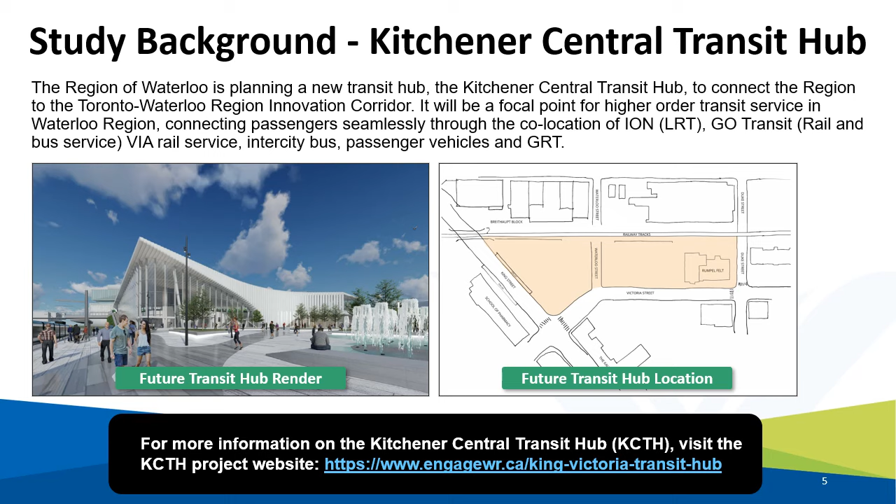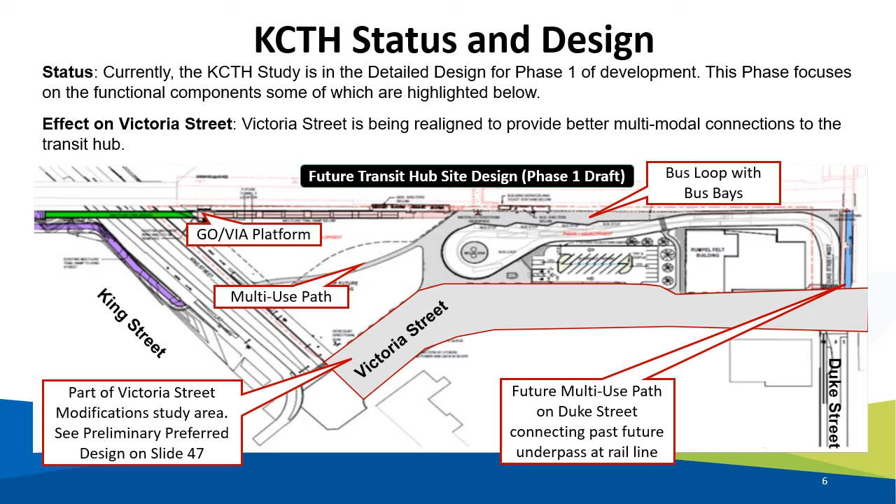This created an opportunity for the region to plan for a roadway that complements the KCTH, that is safe and sustainable, and that accommodates the future larger pedestrian and cyclist movements that result from current and future increasing trends in active transportation uptake. As such, the region initiated the Victoria Street Modifications, King Street West to Weber Street West study. The study area is central to Victoria Street, from King Street to Weber Street.

The study's objectives include but are not limited to the following: create high-quality multimodal connections to facilitate first and last mile connections to the future Kitchener Central Transit Hub site by walking, cycling, and using transit. Support the region's transportation master plan recommendations for providing good walking facilities on both sides of all regional roads, for separated cycling facilities in key corridors, and for increasing transit service frequency.

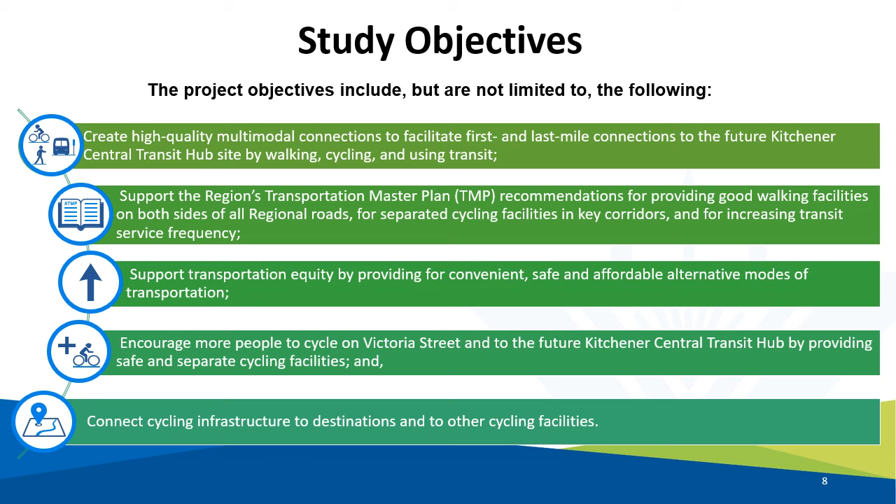Support transportation equity by providing for convenient, safe, and affordable alternative modes of transportation. Encourage more people to cycle on Victoria Street and to the Kitchener Central Transit Hub by providing safe and separate cycling facilities, and connect cycling infrastructure to destinations and to other cycling facilities. In the next slide, we will review the study schedule.

The region initiated the Victoria Street Modifications, King Street West to Weber Street West study in November 2022. Under the newly approved amendments to the Municipal Class Environmental Assessment, or MCEA for short, the study is a Schedule B project. The region recognizes the importance in completing a comprehensive study and in engaging stakeholders and the public during the study. As such, the study is generally following the study process of an MCEA process, which are as follows.

Phase 1, Problems and Opportunities. During this phase, the existing and planned conditions of the study area are reviewed and a Problems and Opportunities statement is stated. These will be presented at this PCC.

Phase 2, Develop and Evaluate Alternative Solutions. In other words, looking at functionally different solutions to the project that address the problems and selecting a technically preferred solution. We are currently at the end of this phase. During the PCC, we will review the work completed to date, the problems and opportunities, the developed planning solutions, the evaluation of planning solutions, and the preliminary preferred planning solution.

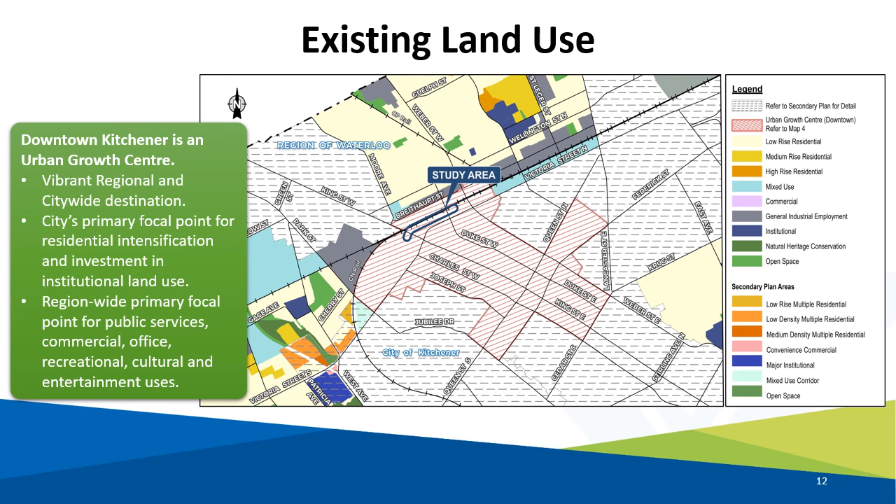The next section summarizes the existing and planned conditions of the Victoria Street modifications, King Street West to Weber Street West study. The map here outlines the existing land uses in the project area. The blue line outlines the project study area. The study is located within the downtown Kitchener Urban Growth Centre, which is envisioned to be a vibrant regional and citywide destination. It is intended to be the City of Kitchener's primary focal point for residential intensification and investment in institutional land use, and a region-wide focal point for public services, commercial, office, recreational, cultural, and entertainment uses.

The study area is located within the Innovation District of the Urban Growth Centre. This district is characterized by many large old industrial buildings which have already been converted or have the potential for conversion to loft-style office and residential uses and other variable uses. This area is different from the rest of the downtown as Victoria Street carries through traffic, not necessarily destined for the city center.

It is anticipated that this district will evolve with the development of the KCTH. The Innovation District will continue to transform into a dense, contemporary urban setting. The presence of high-tech and health science-related office uses, as well as new post-secondary and research-related institutional uses, is expected to grow over time.

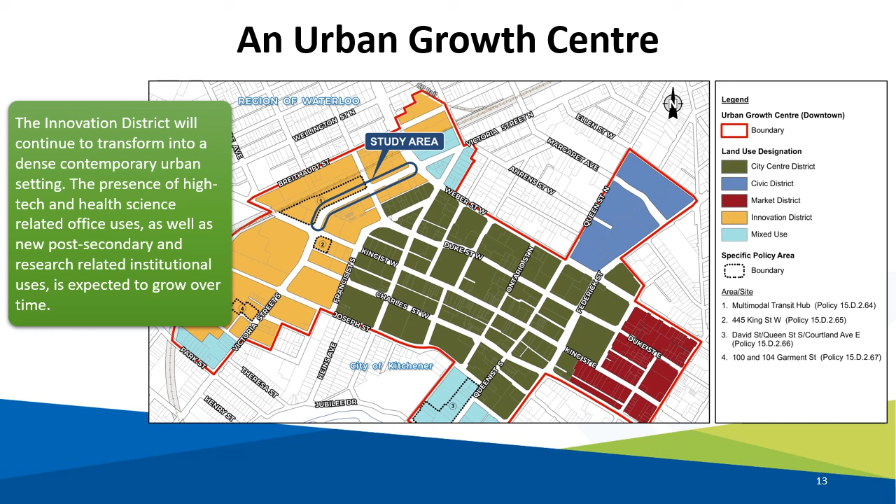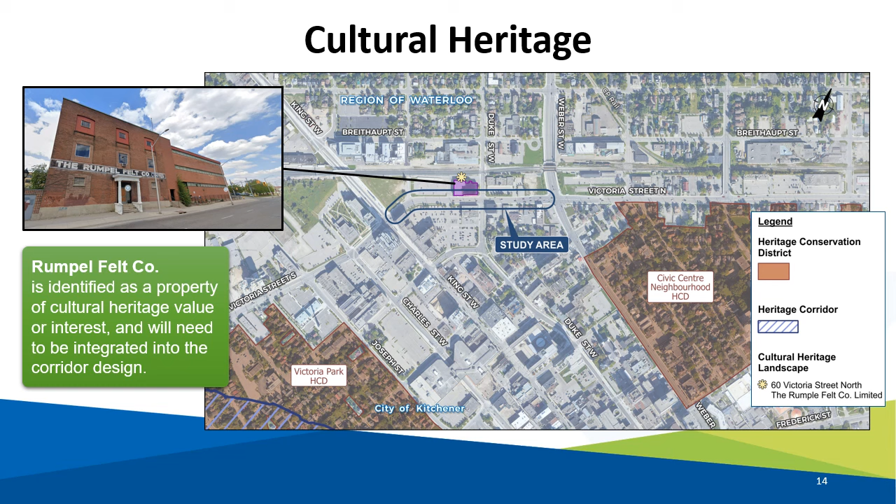The City of Kitchener is rich in history and is home to many built cultural heritage resources and cultural heritage landscapes, which are highlighted in brown. Within the study area, the Rumpel Felt Co. building is identified as a property of cultural heritage value or interest and will need to be integrated into the corridor design. There is a portion of this building that is not set back from the sidewalk and goes right up against the road's right-of-way. This will be a constraint as the road cannot be widened here.

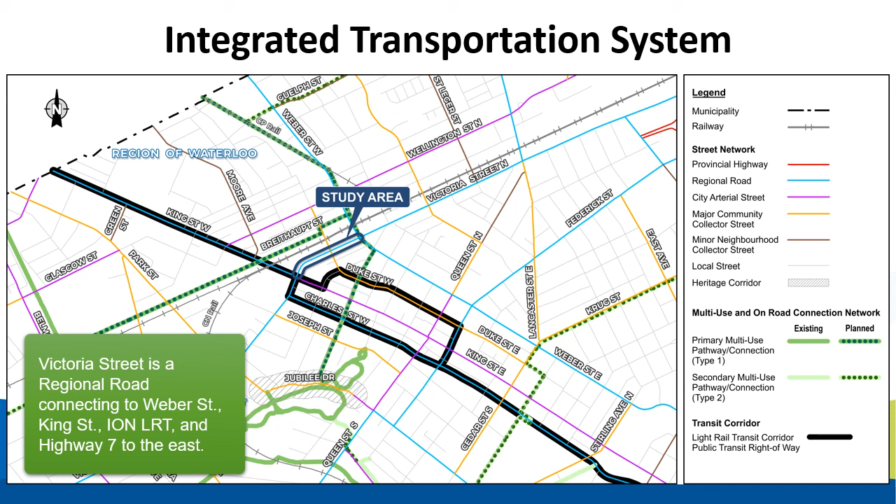Victoria Street is a regional road that travels east-west across the region and through downtown Kitchener. Most notably, King Street, which is a city arterial road, intersects the Victoria Street study area on the west end of the study area. King Street is a major transit connection for the future KCTH, as it is the ION Light Rail Transit, or LRT, corridor, connecting the cities of Waterloo, Kitchener, and Cambridge to major nodes and destinations.

Victoria Street connects to some existing facilities that can accommodate cycling. There are multi-use paths on King Street and Weber Street. There are also planned active transportation connections to the study area, which are shown in dotted lines. There is a planned multi-use pathway that will connect Victoria Street to the future GO Transit and Via Rail train platform and future bus bays, a future two-way cycle track on Duke Street from Victoria Street connecting southbound through downtown Kitchener, and a future multi-use path on Duke Street connecting to the Breithaupt neighborhood.

As mentioned previously, Duke Street north of Victoria Street to the railway tracks will be decommissioned to vehicles. It will only be used by buses entering the bus loop and by pedestrians and cyclists connecting to the multi-use path.

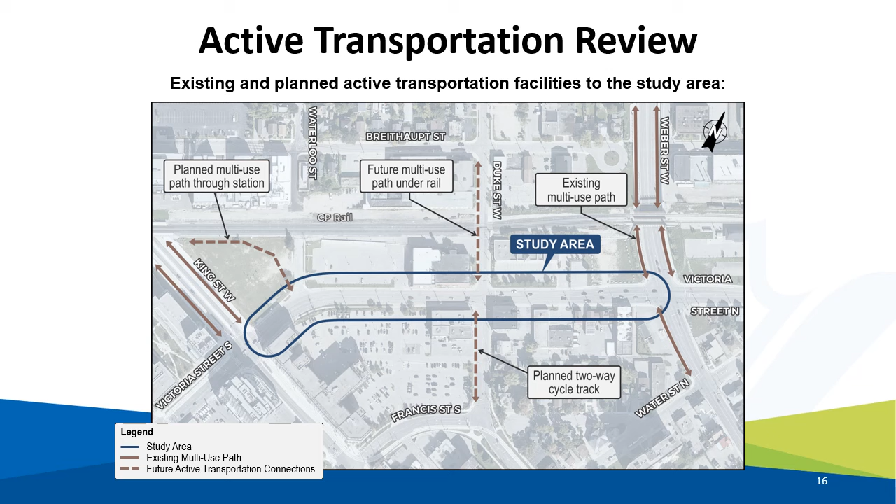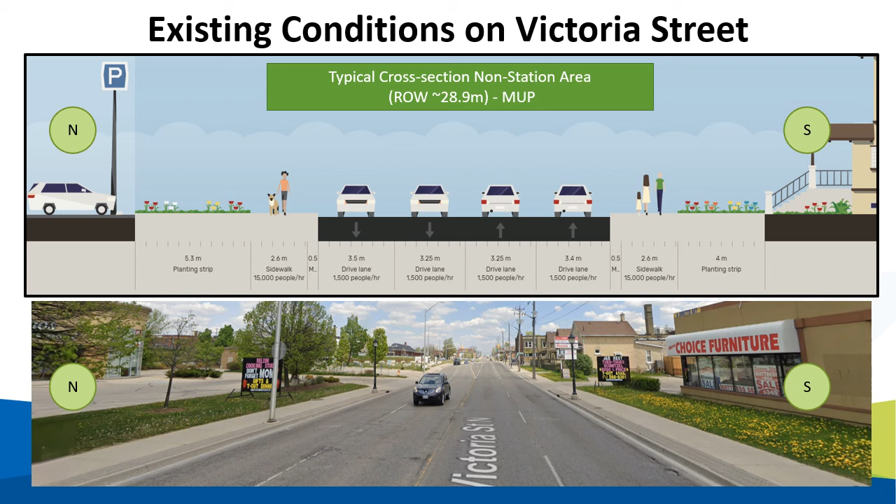The context of the roadway is generally consistent from King Street to Weber Street. This is the view of the existing conditions on Victoria Street, east of Duke Street looking east. Victoria Street is configured with a sidewalk on both sides of the street with 4 vehicular driving lanes. There are no existing cycling facilities in the study area.

The next slides will note the policies and best practices review this project will be following. This project will be working within the existing policy framework at the provincial, regional, and municipal level, such as following the provincial policy statement, places to grow, the regional and local official plan, and the region's transportation master plan, to name a few. The 2018 Transportation Master Plan provides the policy background for the region's transportation network.

Waterloo Region is envisioned to be a prosperous, sustainable, and healthy community with viable transportation choices for people of all ages and abilities, and for the goods supporting our economy. Strategies include Strategy 1, build a transportation network that supports all modes of travel. Strategy 2, promote a healthy community, such as create and/or upgrade active transportation facilities, upgrade facilities to improve separation from traffic, identify opportunities for and implement crossings of major barriers, enhance network connections, and enhance walk and bike access to transit.

More recently, policy direction from the Climate Action Strategy sets high goals for sustainable transportation. The strategy aims for the majority of trips to be taken by active transportation by 2050 through relying on a robust public transit system. To achieve this goal, the strategy guides the region to redesign, rebuild, and maintain our transportation system to prioritize active transportation, plan a network of major active transportation corridors that will provide priority travel for walking, cycling, and rolling to key destinations, build neighborhood connections to the active transportation network, design and maintain active transportation infrastructure to ensure year-round access, safety, and comfort for people of all ages and abilities.

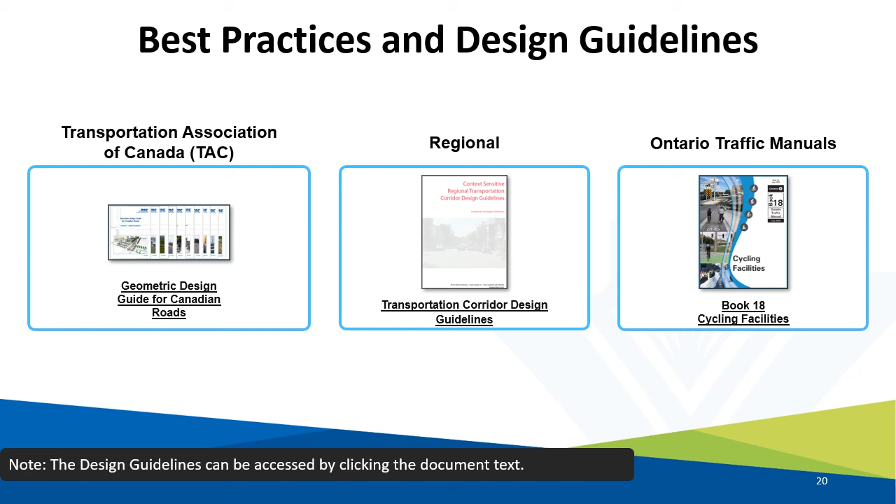This slide includes some examples of the best practices for AT facilities and design guidelines our project team members will be referencing and following, such as the Geometric Design Guide for Canadian Roads, the region's context-sensitive Regional Transportation Corridor Guidelines, which provide design standards for planning and designing complete streets that include space for all modes of transportation, and the Ontario Traffic Manual Book 18, Cycling Facilities. This study refers to these guidelines while also following the latest best practices that have emerged since their publication.

Before we move on to the next section to explore the different design components of a road, there are some design considerations to review. Given Victoria Street's urban downtown context, a complete street approach is taken in the development of roadway configuration options. A complete street design approach was taken in the development of the different design options for the study. With the development of the Kitchener Central Transit Hub, promoting active transportation and encouraging a higher modal split, a complete street will help to enhance the corridor as an inviting, vibrant, and comfortable destination.

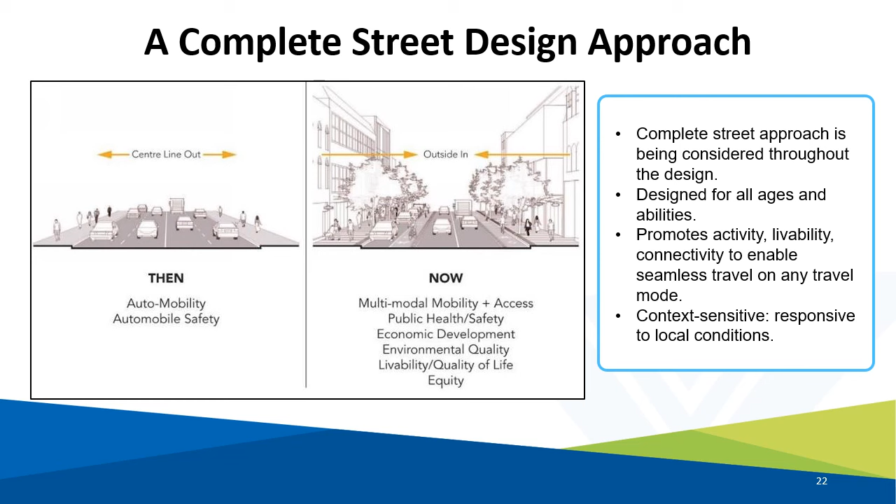Complete street designs are meant for all ages. This type of design promotes activity, livability, and connectivity for all modes of travel. We recognize that each community and each corridor is unique from other ones. As such, the complete street design approach for Victoria Street will include considerations to the projected traffic volumes, the projected needs of the corridor based on future land uses, the existing adjacent and surrounding neighborhoods, the desires of the community and stakeholders, the existing downtown character, and the widths of the road.

The cycling facilities should be elevated and separated from traffic for increased safety and better enjoyment of the street by both drivers and cyclists. Finally, moving towards center, we find the travel lane zones for vehicles here. Adjacent to the travel lane is a street or transit lane. Together, the travel lane and the transit lane form the roadway, the area dedicated to cars.

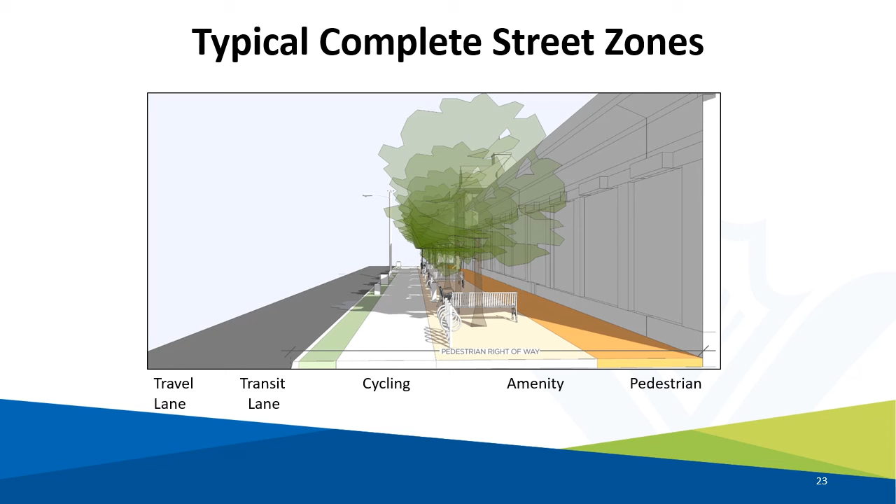Based on the background review of existing and planned conditions of the study area and beyond, a problem and opportunity statement was prepared to guide this study. Due to the Kitchener Central Transit Hub study and planned intensification, there is a need to redesign Victoria Street as a complete street to accommodate the KCTH site plan and design for safe and comfortable active travel due to the future increases in trips made by pedestrians, cyclists, transit users, and motorists.

After the careful review of existing and planned conditions and the preparation of the problems and opportunities statement, the project team considered functionally different methods of addressing the problems and opportunities for the corridor. These are known as alternative solutions and are different for different projects depending on the context.

To follow a complete street approach, the development and assessment of alternatives were broken down into the following steps. Step 1. Develop design alternatives for active transportation and for the roadway separately. Step 2. Develop an evaluation criteria for both sets of planning solutions based on environmental factors, impacts, and mitigation, as well as each planning solution's effectiveness at addressing the problems and opportunities statement.

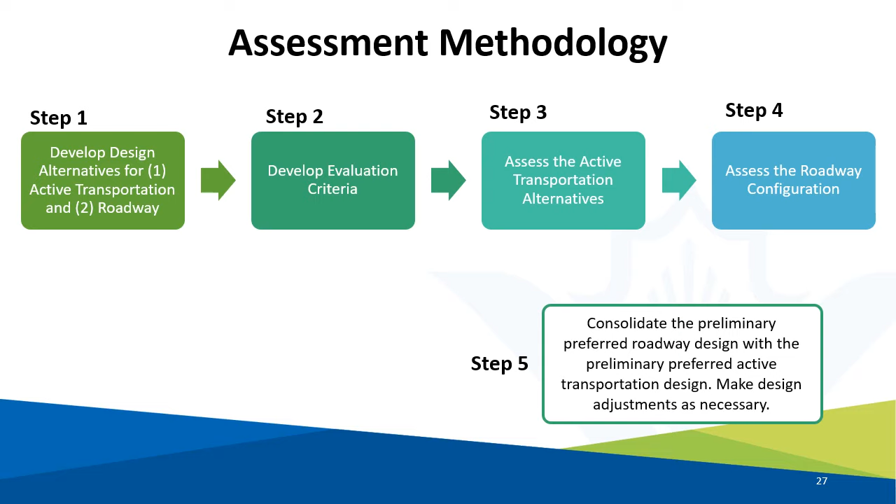Now that we have established the assessment methodology for this study, the next step is to review and evaluate the developed alternative planning solutions for active transportation and to select a technically preferred solution for active transportation. The developed alternatives for active transportation focused on different separated cycling facility options throughout the corridor. Cycling on car-dominated streets is undesirable due to the collision risks between motorists and cyclists. Physically separating cyclists from motor vehicles is the most effective tool to increase safety and cycling volumes.

In fact, only 3 to 5% of cyclists are willing to cycle in mixed lanes. Most cyclists are using sidewalks to travel. However, 50 to 70% of the population is interested in cycling if they are separated from cars. Additionally, motorists are concerned about colliding with cyclists on the road. Separated cycling facilities decrease the pressure on the roads as more people move into the area. Finally, a significant percentage of short trips, under 8 kilometers, are currently being taken by car. A network of separated cycling facilities, if maintained appropriately, also allows for safe year-round cycling, including in the winter.

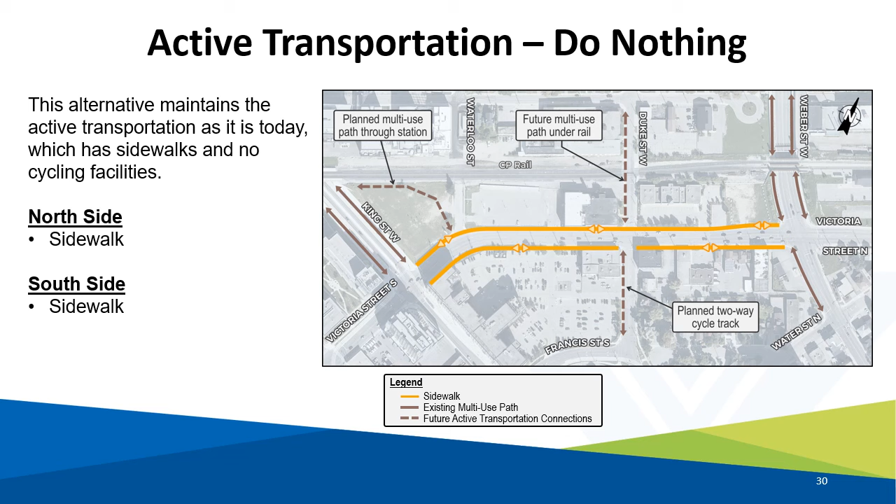This is Alternative A. This scenario improves the sidewalk widths on both sides of Victoria Street and incorporates two-way cycle track throughout the study area, as it is the recommended cycling facility type in dense downtown urban environments. This alternative has two-way cycle tracks on the north side of Victoria Street from King Street to the planned KCTH multi-use path that will connect to the future train platform and bus loop.

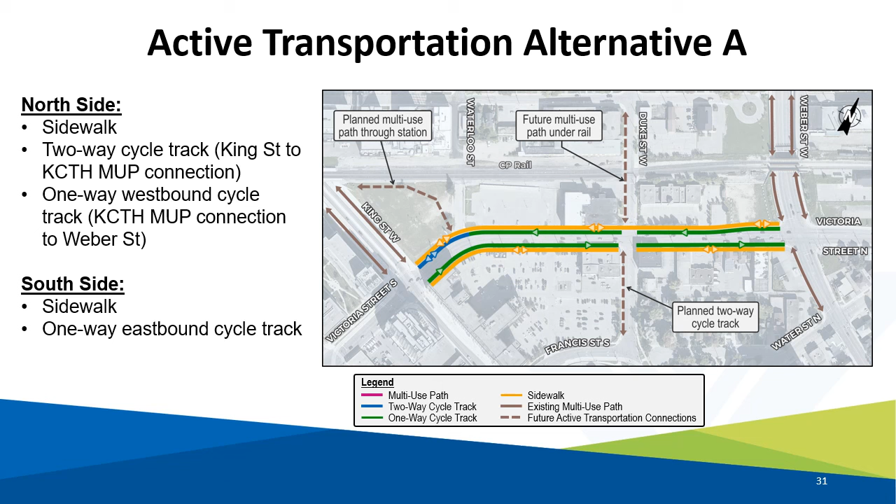Between there and Weber Street is a one-way westbound cycle track to Weber Street. On the south side, this alternative has a one-way eastbound cycle track traveling from King Street to Weber Street. All alternatives have the one-way eastbound cycle track traveling from King Street to Weber Street on the south side of Victoria Street except for Alternative D.

This is Alternative B. Like Alternative A, this alternative has the two-way cycle track on the north side of Victoria Street from King Street to the west end of the Rumpelfeld Co. building, and a one-way westbound cycle track from Duke Street to Weber Street. In this scenario, a multi-use path is located in front of the Rumpelfeld Co. building. This option was explored as the space in front of the Rumpelfeld Co. building is a constrained pinch point in the Victoria Street roadway at the intersection of Duke Street.

It should be noted that multi-use paths are not recommended in urban downtown roadways, as it is not considered safe nor comfortable in this context. Rather, multi-use paths are generally used in suburban and rural contexts. Like Alternative A, this scenario improves the sidewalk width on both sides of Victoria Street and has a one-way eastbound cycle track traveling from King Street to Weber Street on the south side of Victoria Street.

This is Alternative C. In this scenario, a multi-use path is located from the east end of the Rumpelfeld Co. building to the Weber Street intersection. This option builds off Alternative B to continue the multi-use path to Weber Street, where there is an existing multi-use path. Like Alternative A, this scenario improves the sidewalk widths on both sides of Victoria Street and has a one-way eastbound cycle track traveling from King Street to Weber Street on the south side of Victoria Street.

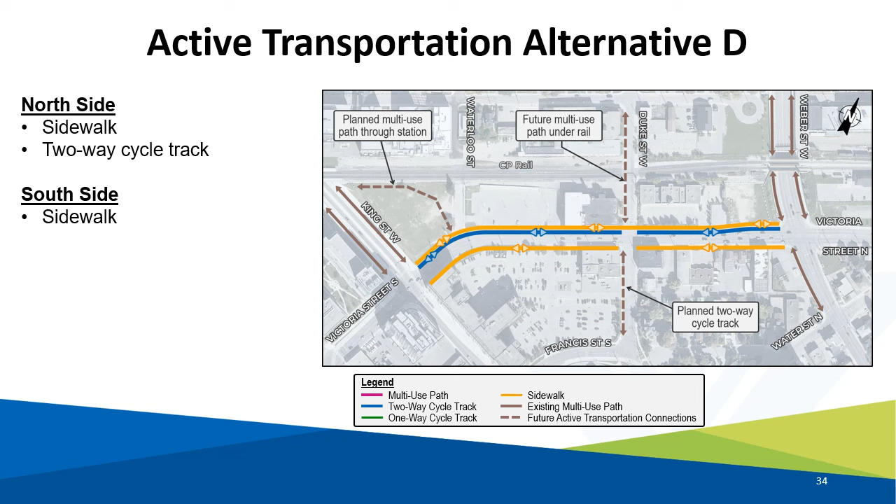The next section will present the evaluation criteria and assessment of these active transportation solutions. After identifying the alternative active transportation solutions, they were evaluated against the following criteria to determine their socioeconomic impacts as well as the planning and transportation needs of the alternative planning solutions. Some of the sub-criteria include

safety for pedestrians, including minimal exposures to bike and traffic, especially at intersections. Safety for cyclists, including safe crossings at intersections. Comfort for pedestrians, including facility width, separation from cyclists and traffic, and presence of landscaping. Comfort for cyclists, including facility width, separation from traffic, and presence of landscaping.

Connections to planned intersecting cycling facilities, preliminary property impacts, and the multimodal level of service, a new methodology for analyzing the quality of service provided by streets and intersections to users of all modes of travel, including transit, cyclists, pedestrians, trucks, and cars.

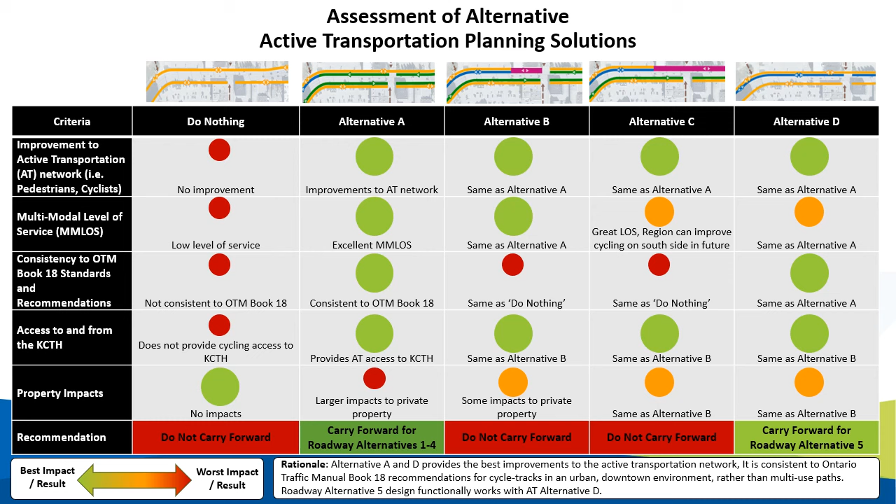These alternatives were evaluated to have the best benefits because they provide the best improvements to the active transportation network, both in terms of connections to other facilities, but also provide the safest and most comfortable travel for cyclists, and they are consistent with Ontario Traffic Manual Book 18 recommendations for cycle tracks in an urban downtown environment rather than multi-use paths. Therefore, alternatives A and D are the recommended alternatives. The selection of which alternative to use will depend on the functional compatibility with the preferred roadway alternative.

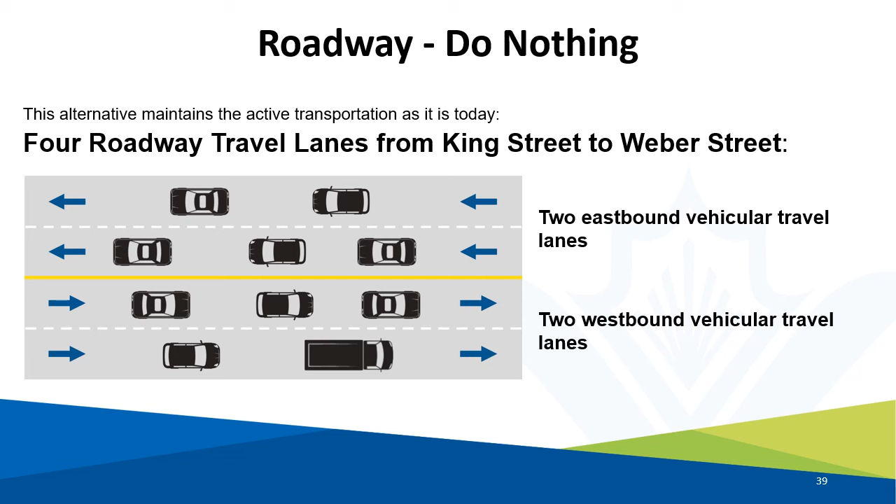The next section will present the developed alternative solutions for the roadway, meaning for vehicular travel. The first alternative is a do-nothing scenario. For the roadway, that means maintaining the existing vehicular travel lanes as they are, with 4 lanes of vehicular travel, 2 in each direction, westbound and eastbound. Alternative 1 has 3 vehicular travel lanes, 1 eastbound vehicular travel lane, 1 westbound vehicular travel lane, and a 2-way left turn lane as the center lane.

Alternative 2 has 3 vehicular travel lanes, 2 westbound vehicular travel lanes, and 1 eastbound vehicular travel lane. This alternative was developed based on traffic patterns coming from Highway 7 to the east and into or through the downtown. Alternative 3 has 3 vehicular travel lanes, 1 westbound vehicular travel lane, 1 eastbound vehicular travel lane, and 1 westbound transit priority lane. This alternative was developed based on anticipated transit traffic volumes that will be traveling to and from the KCTH.

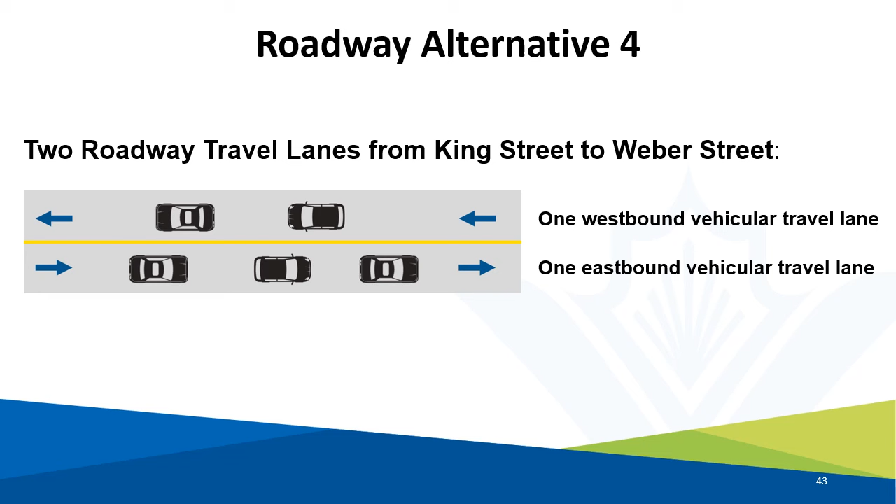Alternative 4 has 2 vehicular travel lanes, 1 westbound vehicular travel lane and 1 eastbound vehicular travel lane. This alternative was developed based on the principle of maximizing space for pedestrians and cyclists. Alternative 5 has 2 vehicular travel lanes and 2 transit priority lanes, 1 westbound vehicular travel lane and 1 eastbound vehicular travel lane, and 1 westbound transit priority lane and 1 eastbound transit priority lane.

This alternative was developed in collaboration with Grand River Transit and maximizes access to and from the Kitchener Central Transit Hub for all modes of transportation. This alternative considers the needs and safe access for transit vehicles that will be traveling along this corridor and their frequent access to the future bus loop entrance at Duke Street.

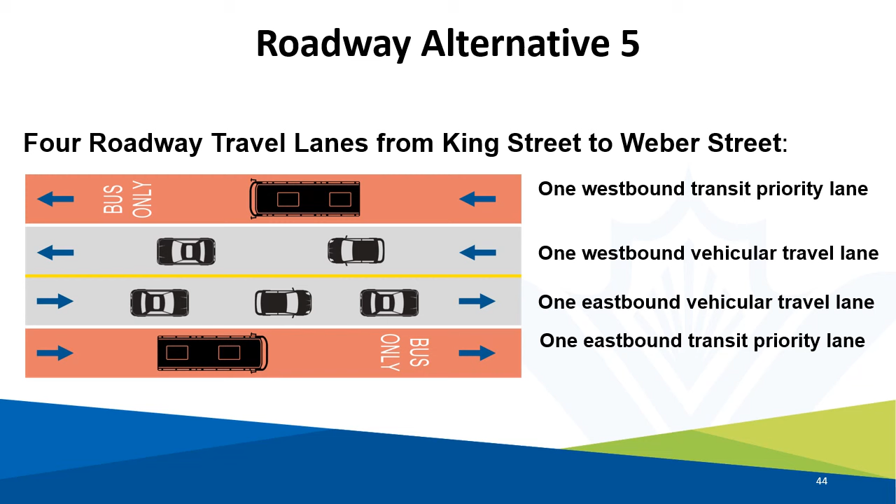After identifying these alternative roadway solutions, they are evaluated against the following criteria to determine the socioeconomic, natural, and cultural environmental impacts, as well as the planning and transportation needs of the alternative planning solutions. Some of the sub-criteria include consistency with applicable plans and policies, the ability to enhance the public realm or contribute to the downtown's revitalization, potential impacts to climate change, potential impacts to cultural heritage, potential impacts to access to the KCTH, potential impacts to transit and traffic operations, and potential traffic disruptions.

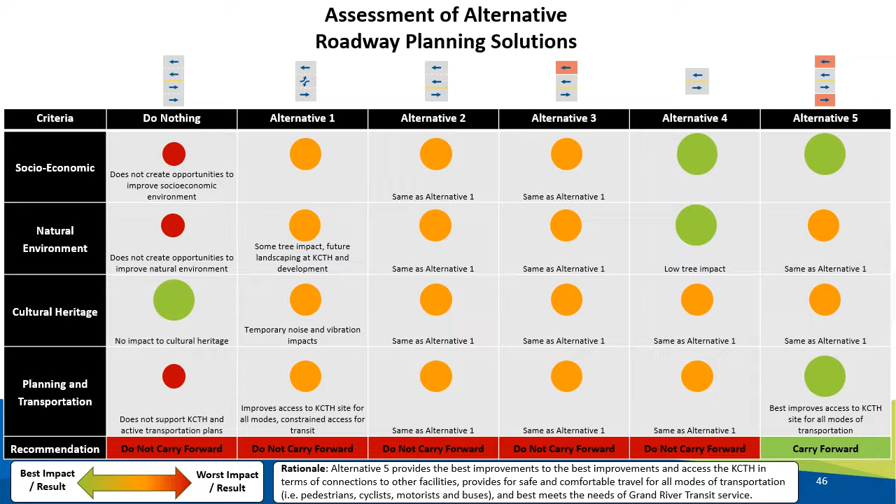With the selection of the preferred active transportation alternative and the preferred roadway alternative, a preliminary design has been started, which combines the 2 preferred solutions. The technically preferred motor vehicle lane alternative is a 3 to 4 lane roadway with 2 motor vehicle lanes from King Street to Duke Street, 1 transit priority lane from King Street to Duke Street, and 2 transit priority lanes from Duke Street to Weber Street.

Due to the constrained roadway in front of the Rumpelfeld building on the west side of the Duke Street intersection, a westbound transit priority lane does not functionally fit. As such, it was not included in the technically preferred design. The westbound transit priority lane is restarted closer to King Street.

Functionally, this 3 to 4 lane motor vehicle alternative works with Alternative D from the Alternative Active Transportation Solutions. As such, this motor vehicle and transit priority design is combined with Alternative D, which has sidewalks on either side of Victoria Street and 2-way cycle tracks on the north side of Victoria Street. This configuration provides safe and comfortable travel for cyclists and pedestrians, as well as transit vehicles and motorists. The design will be developed to a preliminary design stage, then proceed to detailed design, tender, and construction.

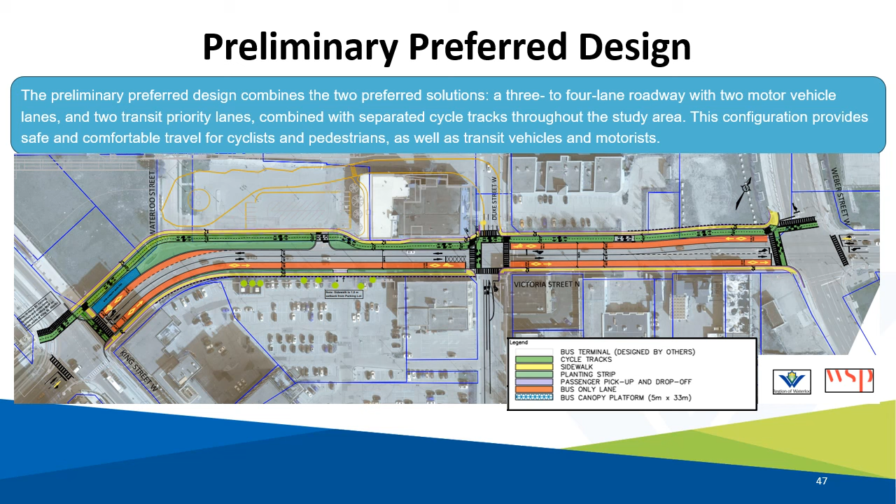As part of the Victoria Street Modifications King Street West to Weber Street West study, a traffic analysis was carried out for the future conditions based on the technically preferred alternatives. The traffic analysis looked at the weekday morning peak hour and afternoon peak hour operations for the 2028 year future condition of Victoria Street based on a 2-vehicular lane roadway. The traffic analysis found the majority of the corridor operating with good conditions.

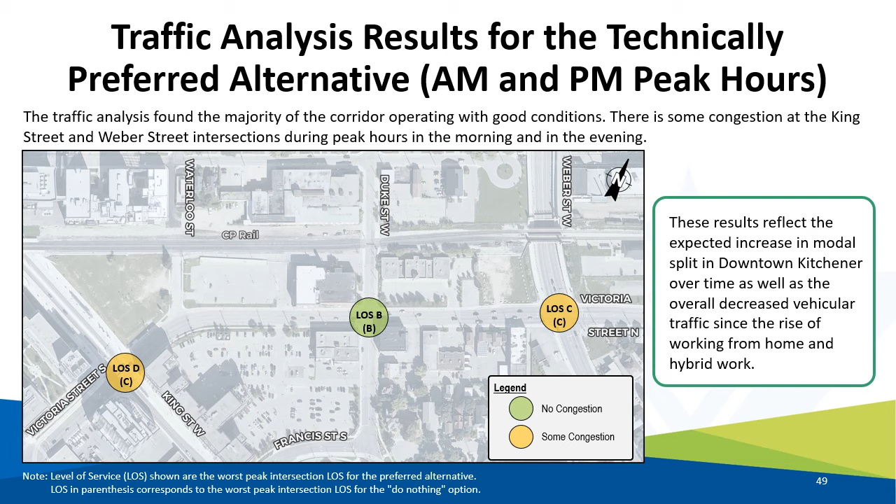There is some congestion at the King Street and Weber Street intersections during peak hours in the morning and in the evening. The traffic analysis was carried out with input assuming the construction of the KCTH. These results reflect the expected increase in modal split in downtown Kitchener over time, as well as the overall decreased vehicular traffic since the rise of working from home and hybrid work. The next slide will look at access management in the study area based on the 2-way roadway configuration.

Access management is the proactive management of vehicular access points to adjacent properties, such as parking lots and driveways, from the roadway. Good access management promotes safe and efficient use of the transportation network. By managing the access to 3 parking lots, traffic flow is improved. The existing Kaufman Lofts parking lot access from Victoria Street is proposed to be a right-in, right-out only access. This means that vehicles must turn right in to get into the parking lot and turn right to exit the parking lot.

Further, the off-street parking of the property located at 241 Duke Street is proposed to be removed. The existing angled parking would require backing up over a sidewalk and transit priority lane, which is unsafe for pedestrians and motorists.

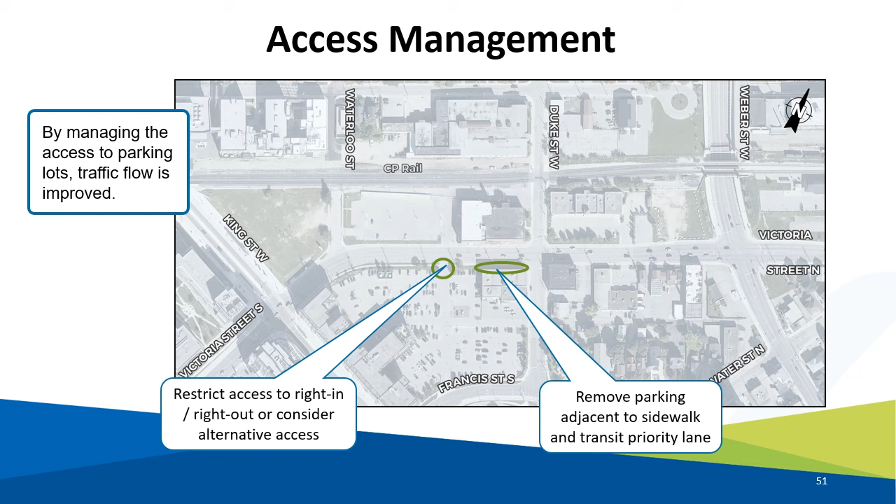Next steps and how to provide feedback. Following this Public Consultation Centre, the project team will review and respond to questions and comments, tracking all feedback, review the design in light of comments received and make design refinements as needed, and initiate the detailed design and tender documentation process. The construction timing will be subject to funding availability and priorities.

What are some of your comments on the improvements proposed for pedestrians and cyclists on Victoria Street? We encourage you to submit any comments or questions to the project team by July 1st, 2024. You can use the comment form on the webpage for the PCC. Should you wish to provide comments in another way, please contact the City Project Manager listed in the PCC display board or on the project website on the next slide.